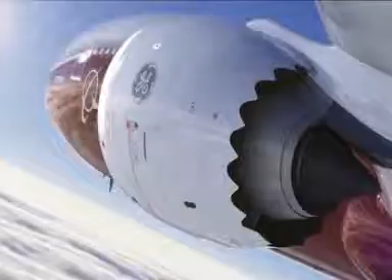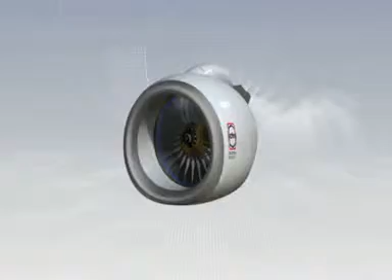The next generation gas turbines will operate at higher pressure ratio and hotter turbine inlet temperature conditions that will tend to increase nitrogen oxide emissions. To conform to the future air quality requirements, lower emitting combustion technology will be required. Some new combustion systems will be introduced.

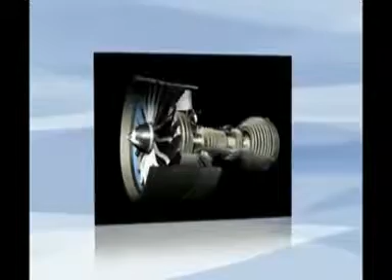First is trapped vortex combustion, or TVC. The trapped vortex combustor may be considered a promising technology for both pollutant emissions and pressure drop reductions. TVC is based on mixing hot combustion products and reactants at a high rate by the cavity stabilization concept.

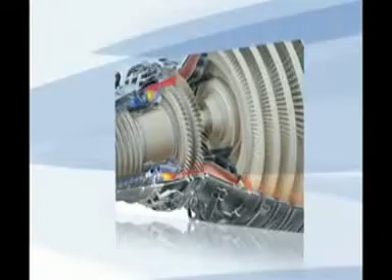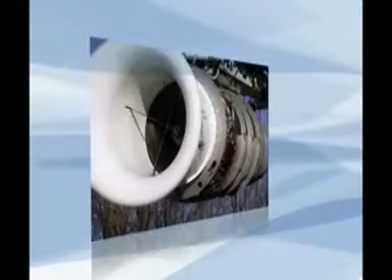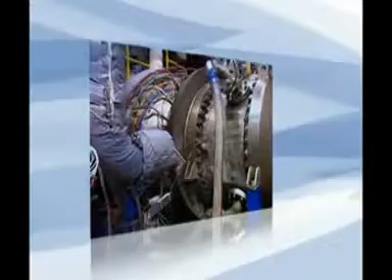With these technologies, it is possible to burn a variety of fuels with medium and low calorific values. It is possible to operate at high excess air premix regimes, given the ability to support high-speed injections, which avoid flashback. NOx emissions reach extremely low levels without dilution or post-combustion treatments. It produces an extension of the flammability limits and improves flame stability.

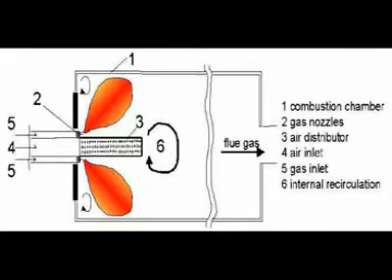Next is continuous staged air combustion. The concept uses continuously staged air and internal recirculation within the combustion chamber to obtain a stable combustion with low NOx and carbon monoxide emissions. The burners have the advantage of operating in full diffusion mode or in a partially premixed mode.

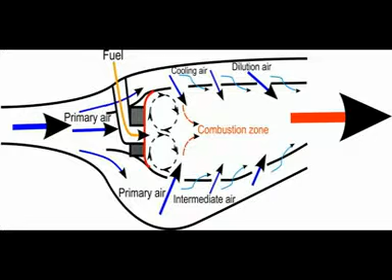The heat is released more uniformly throughout the combustion chamber. Also, the recirculated gas absorbs some of the heat of combustion. It is capable of working stably at hot combustor walls as well as high air ratio.

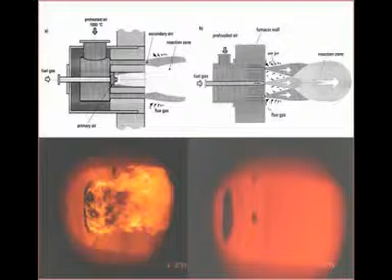The third one is MILD combustion. Heat recirculating combustion was clearly described by Weinberg as a concept for improving the thermal efficiency. In flameless combustion, the oxidation of fuel occurs with a very limited oxygen supply at very high temperatures. Spontaneous ignition occurs and progresses with no visible or audible signs of the flame

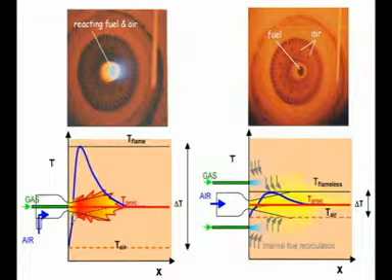usually associated with burning. The chemical reaction zone is quite diffuse, and this leads to almost uniform heat release and a smooth temperature profile. All these factors could result in a much more efficient process as well as reducing emissions.

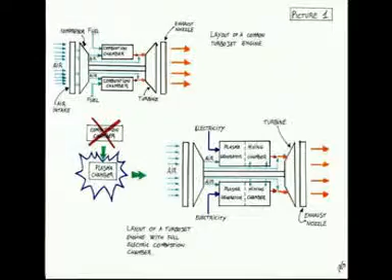The last one is the full electric combustion chamber. Plasma propulsion engines are currently used in space missions. They use the kinetic energy of plasma itself to generate the thrust required by the spacecraft. The idea instead is to use the plasma and its great heat to replace the heat generated by the combustion of fuel. And this is the chart of the full electric combustion chamber.

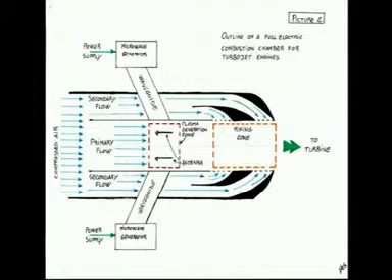The primary flow comes to the plasma zone, receives the heat, and goes through the mixing zone before passing through the turbine blades. This is a clean energy technology, with no NOx or other emissions. These are the ideas of the future design.

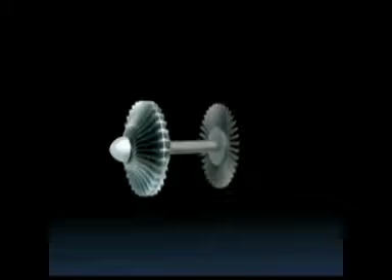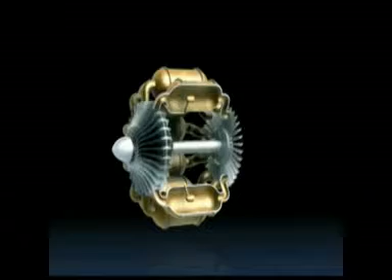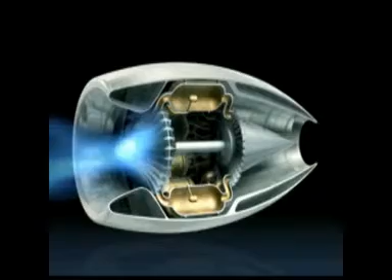Although the turbine inlet temperature is the major factor determining the overall efficiency of a gas turbine, high inlet temperatures will result in larger NOx emissions. So the essential requirement of the new combustor design is a trade-off between low NOx and improved efficiency. And this is the end of the video.